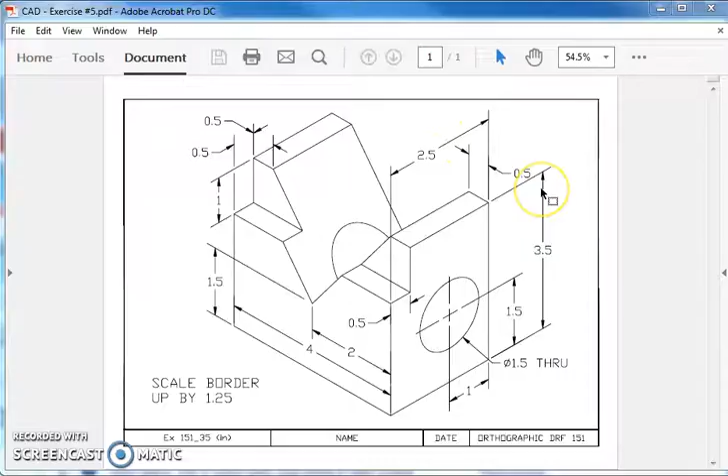Okay, for exercise number 5, the first thing that you want to notice is that we are working in inches on this one. And if you look at some of the dimensions, the overall dimensions of this shape, it's 4 inches all the way across the front. It has a depth of 2.5 inches, and then it has a height of 3.5 inches. We will start this design by making a block with those dimensions.

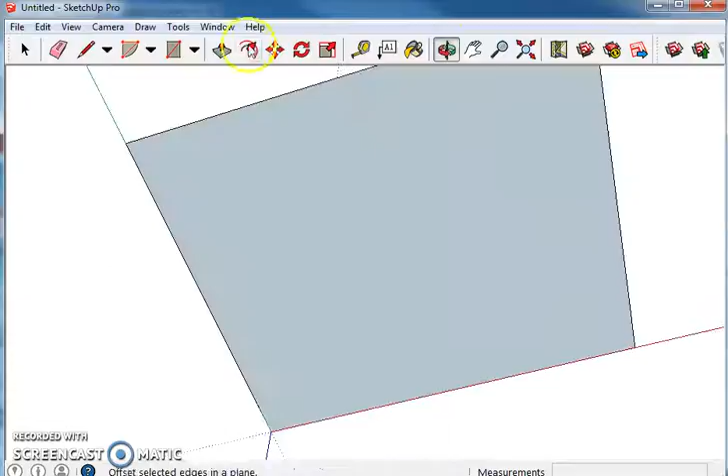So here we go. Make sure you select feet and inches in SketchUp. I'm going to go ahead and draw a rectangle 4 inches by 3.5 inches. Zoom extents. And then I'm going to just pull this out 2.5 inches. 2.5. Alright, so now I have the overall shape of the block.

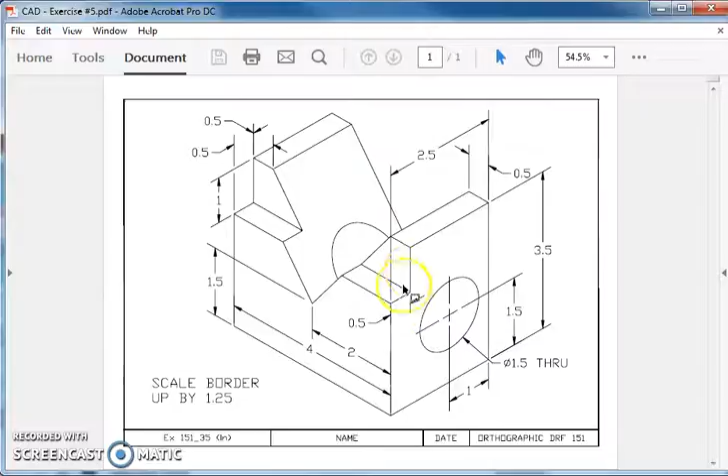The next thing that I would recommend doing is if we go to the actual drawing, we see that there's this shape that's cut out all the way across. Well, I could draw a rectangle right here on the side, on the right side, and push it all the way through, or I could draw a rectangle on the front and push it back. It says that it goes down 1 inch, and then it's cut out 1/2 inch. So let's see if we can do that.

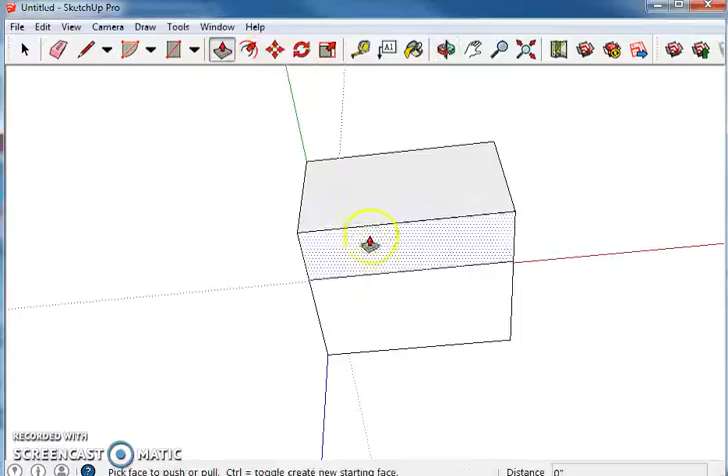I'm going to draw it across the front 4 inches, because we want to go the length of the block, and then it's 1 inch tall. Here we go. And then this gets pushed back 1/2 inch, 0.5 inches. Alright. We want to cut this V shape out.

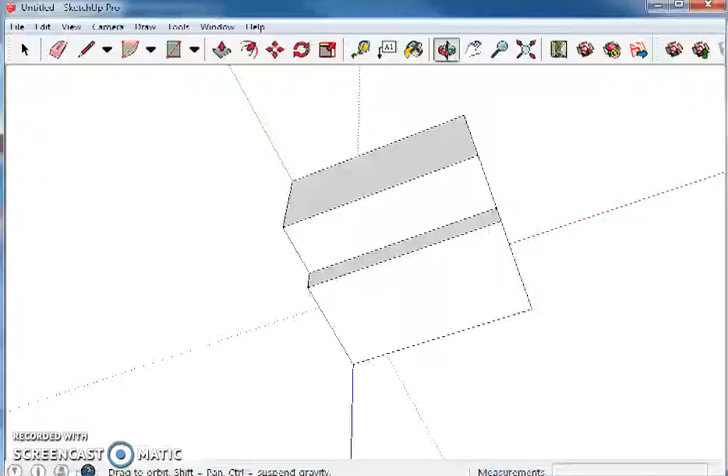I'm going to go to the back for this, draw the V, and this point right here is 2 inches from the edge, and then it's 1.5 inches from the bottom. So let's see if we can do that. I'll go back here. Use my measuring tape. 2 inches from the edge, 1.5 inches from the bottom, and then all I have to do is connect the corners to that

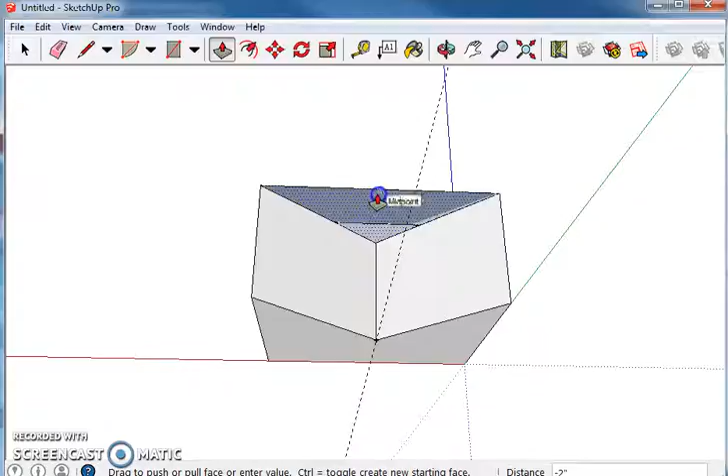and push it through. I'm going to push it through to the first surface. You'll notice that it doesn't delete the whole thing, so I actually have to go back and click the eraser tool to get rid of that. And then I need to finish going all the way through, just like that. Alright, so now the overall block is done.

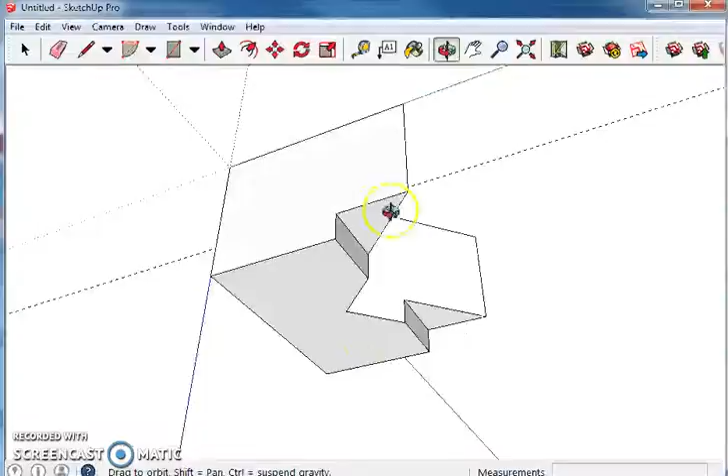The only thing that I have to do now is cut the hole through the side. I'm going to get rid of these, well, we'll leave those for now. If you notice, this hole actually has a diameter of 1.5 inches. The center of the hole is 1.5 inches from the bottom and 1 inch in from the back. So let's see if we can draw a circle, and then there's one last thing that we have to do to finish this off.

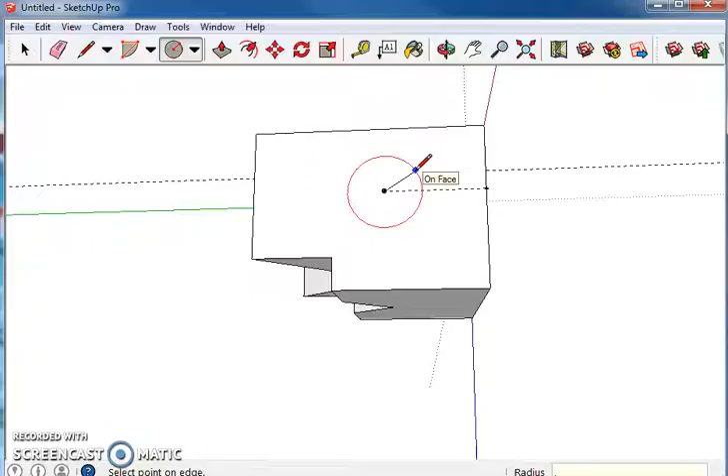So it's 1 inch from this edge, 1.5 inches up from the bottom. It has a diameter of 1.5, so it's asking for the radius, 0.75 inches. You can also use fractions. And now I want to cut this all the way through, but you'll notice that it leaves me with this surface right here that I need to get rid of.

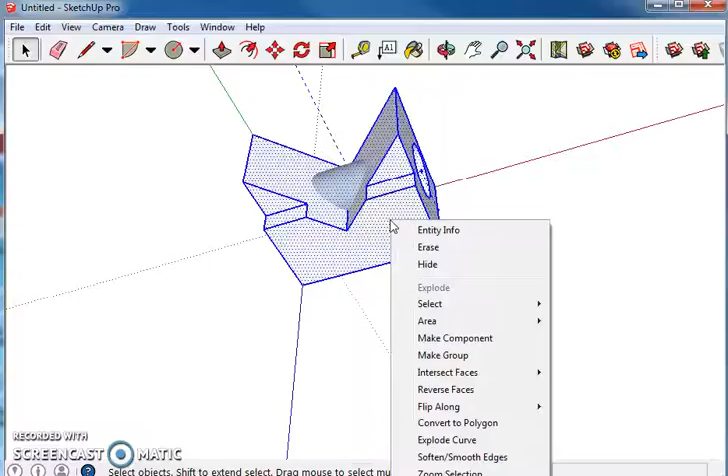The way we get rid of that is by highlighting everything, right-click with your mouse, select Intersect Faces with selection, and now I can actually just click on that, erase it, click on that surface, that line, and erase it. And it's complete.

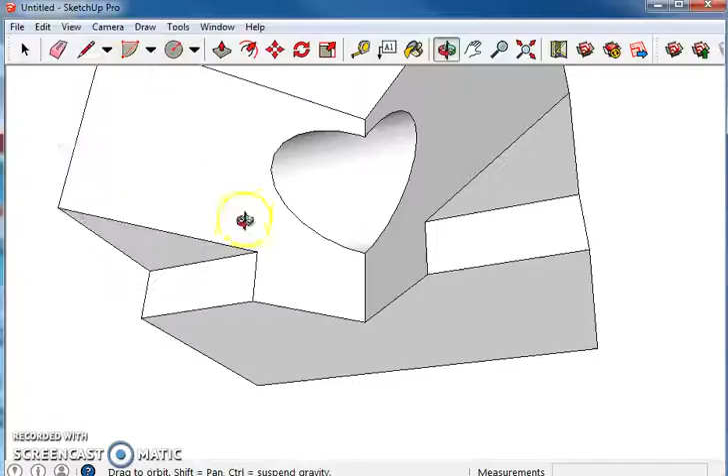To finish this off, I will get rid of the axes and the guidelines. Remember to add dimensions before you submit it. Other than that, that's all there is to it. Okay, good luck.